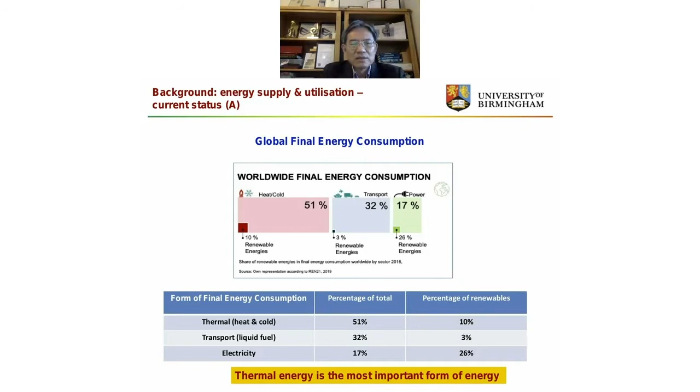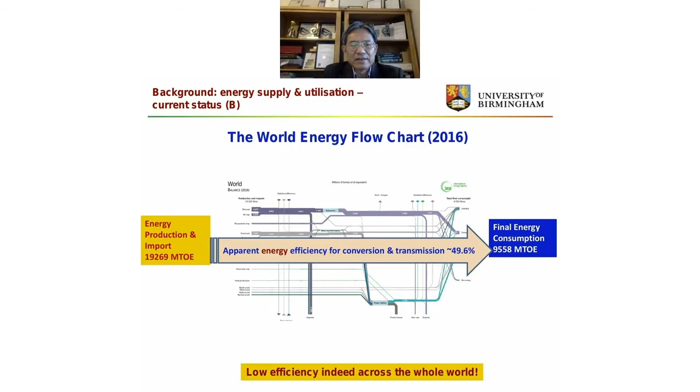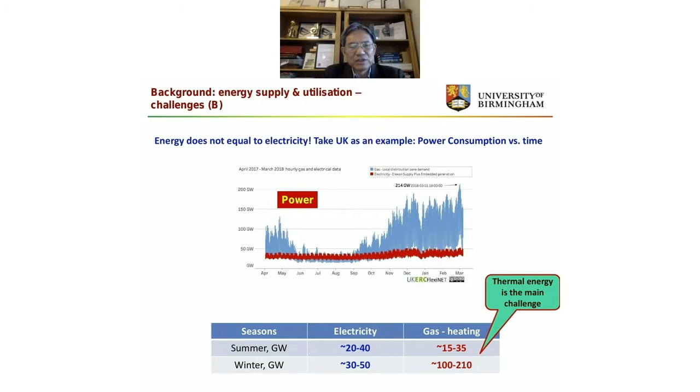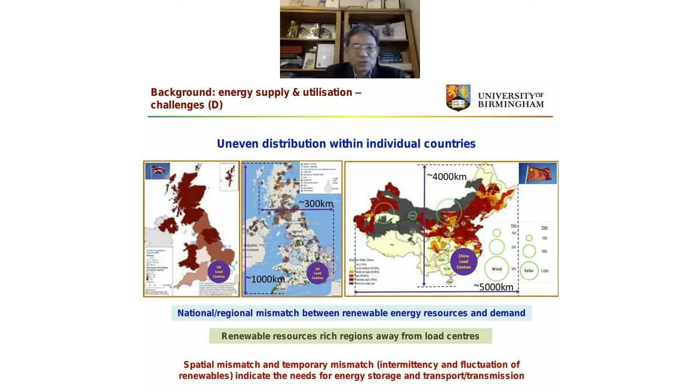So this is actually showing the UK, and the right-hand side is China, which is the biggest polluting country. So you can see the renewable energy sources are far away from load centers, which for the UK are mainly in the southeast. In China it is southwest and east as well. So again, this poses a big challenge for the use of renewables.

So let me just tell you something about the emerging technologies in the energy area, and something which people have not considered, or they have considered but choose not to say. Although we are in a different area, I'm sure you have heard about the electrification of transport, pure electric vehicles in the future.

So I did a simple calculation from the primary energy sources, like coal, fossil fuels, wind, or solar. If we turn these primary energy sources into electricity, the efficiency is about 40%. 60% of that turns to heat. If you then store electricity using batteries, that's probably the highest efficiency for storing energy. The efficiency is about 80%. Actually, it's probably lower than that, which means 20% turns to heat. Then you use the stored electricity for powering an electric vehicle, and the efficiency is probably 80% as well. So if you multiply those, the overall efficiency from primary energy sources to driving a car is less than 30%.

Bear in mind, if you look at the right-hand side, for electric vehicles running in a cold winter, the range is halved, by range meaning the range you are told by the manufacturer. Actually, you can't achieve that range. The reason is that about 50% of battery power is used for heating. Those are actual numbers from the statistics, which you can find on a website. I just put them in a diagram. So basically, half of the battery power is for heating. So again, this efficiency is not very good.

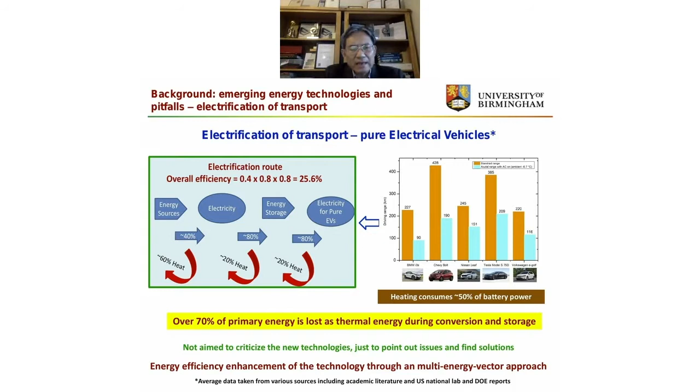And what about the hydrogen economy? People have been discussing the hydrogen economy for 50 years, even longer. So if I do the same thing from primary energy sources, producing hydrogen using electrolysis, for example: we produce electricity first, turn electricity into hydrogen for storage, and then use a hydrogen fuel cell for driving a car. If you work it out, less than 10% of the actual primary energy is used for driving a car. The rest, more than 90%, turns to waste heat.

So here, I must say, this is not for criticism. It's just to try to point out the things which they have not considered, and to try to develop new technology to make use of that waste heat. And this also indicates that something called the multi energy vector approach is important to make use of that.

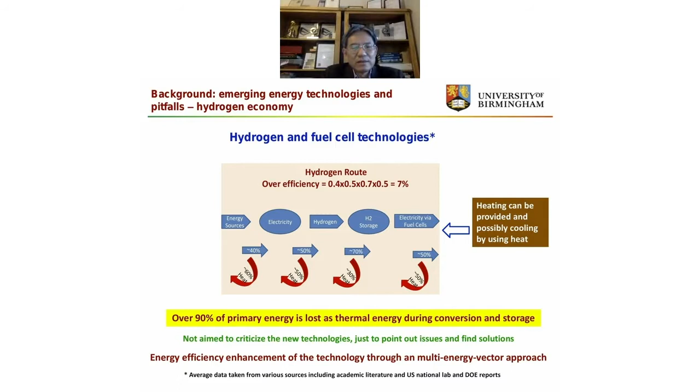So what about very popular ideas about carbon capture, storage, and utilization? What I can tell you is that for fossil fuel power generation, you need to spend about 10% of the electricity generated for carbon capture storage. In other words, the electrical generation efficiency will be reduced by roughly 10%.

And when you capture CO2 and you transport CO2, you need to spend energy, particularly electric energy. For example, you have to compress carbon dioxide to a higher pressure or liquid form, and you need to transport. That would mean another 35% of electric energy turns to heat. So there's quite a lot of loss here. People don't talk about it, but actually we have to consider those from a whole system approach.

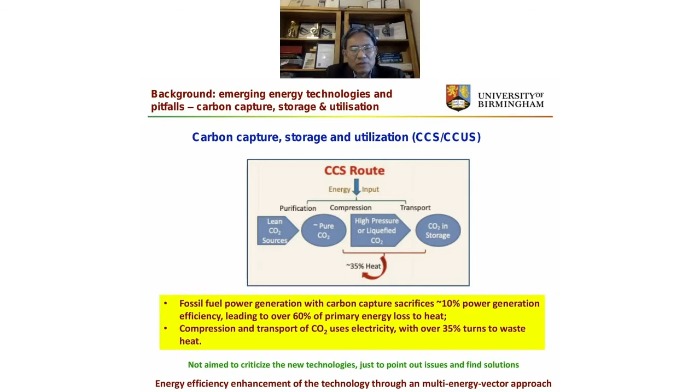What about other things, the new technologies like electronics, telecommunication, 5G, artificial intelligence, autonomous vehicles? I can tell you those systems are highly energy intensive globally. Roughly 30% of electrical energy generation has been projected to be used for data center cooling and telecommunication cooling as well.

So it's big. This is not far away. I mean, 2030 to 2040, think about 30% of global electrical power generation to be used for data centers, telecommunication, and so on. Of this amount of electricity, 40% turns to heat. Again, we have to use thermal energy, including heat, which is important to remember.

And next I'm going to tell you about the main topic, cryogenic energy storage. I'll bring you through the principle and the technology development history, talk a little bit about the thermodynamics of the technology, and look at the world's first cryogenic energy storage pilot plant, some of the results and their implications. I will make some comparisons with other technologies, the cost implications, and also what space is needed for installing this technology. So that's what I'm going to do.

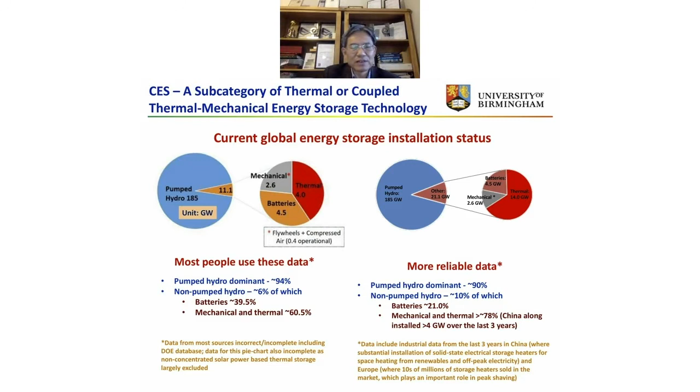Now I'm going to say a bit about the principle of the technology. Cryogenic energy storage is a collection of technologies using cryogenic material, which can be liquids, solids, or other stuff, as storage material. I'll use liquid air as an example to tell you the principle. Basically, when you have excess energy you can't use, or when energy is cheap, you store energy.

In this technology, you liquefy air by using off-peak electricity or renewable energy, so liquid air is the storage medium, and the way air is liquefied, basically you compress first and then expand.

You use a refrigeration loop to turn air to liquid. Liquid air has a density of about 850 kilograms per cubic meter, which is a lot lighter than water. Water is about 1,000 kilograms per cubic meter. So you can have a sort of feel about what liquid air looks like. It looks like water, and it's lighter than water. But the temperature of liquid air is roughly minus 196 degrees.

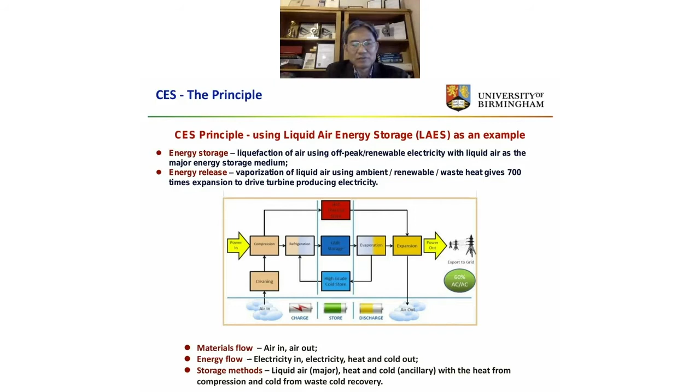This diagram shows you the technology development since I started to work around 2005. We built a small system, 15 kilowatts, then 35 kilowatts. Then around 2008, we built 350 kilowatts and 2.5 megawatt hours systems, and around 2015, Highview started to build the commercial demonstration plant in Manchester, which is a 5 megawatt, 15 megawatt hour commercial system. This is with a Viridor biogas site.

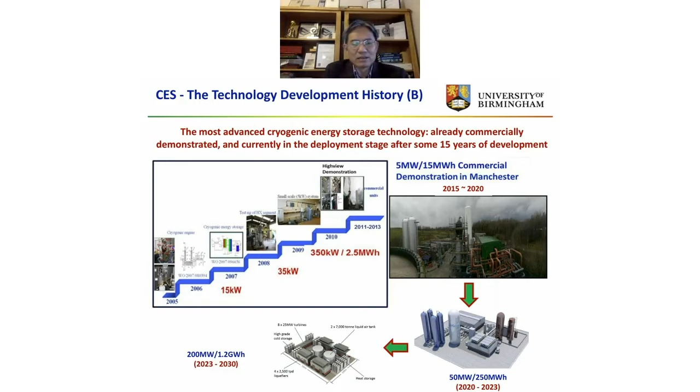So again, this one is just showed as I just mentioned. The left side is the first pilot plant built in Slough, and around 2014, the pilot plant was moved to Birmingham, just behind my lab on the Birmingham University campus, which is quite small actually. Of course, the difference here is there's a tank in the middle, which is for thermal storage. There was no thermal storage at the first Slough site. So this is today used for research and development in my group and the Manchester group.

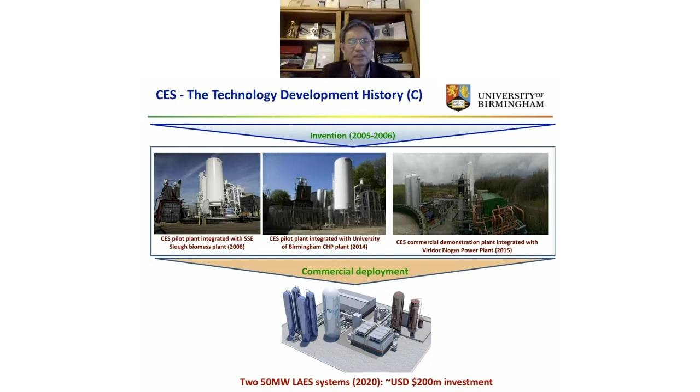Let me just tell you a little bit about the thermodynamic basis. This is very simple actually. If you look at this diagram, the vertical axis is the availability of energy, which means the portion of thermal energy which can be used to produce power, and the horizontal axis is temperature. If we use ambient temperature as a reference, there are two lines. One goes to the hot side, high temperature side. One goes to the cold side. So you can see the availability of energy for the cold side is higher for a given temperature difference with reference to the ambient temperature.

For example, if I take about 150 degrees as an example here, you look vertically upwards. Basically, the availability of energy which can be turned to useful energy is about 40%. If you look at the hot side, it's only 20%, which means cold energy is more valuable than hot energy. And if you look at the mechanism, when you turn matter to the cold side, the kinetic energy of molecules decreases, but the entropy also decreases because the molecules become more ordered. If you go to the hot side, it's the other way around. Linking those two, you can see that entropy plays a big role in terms of availability of the energy that can be turned to useful energy.

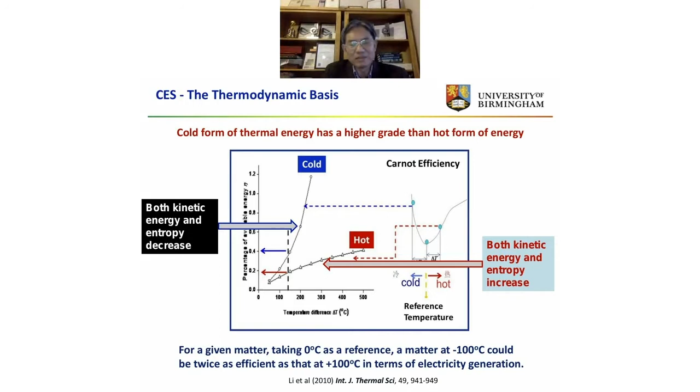And I'm going to tell you a bit about the world's first pilot plant, which is 350 kilowatts and 2.5 megawatt hours, which is sufficient to power about 100 homes for a day. It's on our campus, and actually today it is still the only one which produces liquid air and produces electricity. Still working.

So the first thing I'm going to tell you is that for any storage technology, if you can store and release quickly, then it will be more valuable. For example, frequency regulation of the power grid, which means supporting the frequency at 50 hertz, otherwise the system will collapse. So it is the response speed. That's why I'm going to tell you first how quickly the plant can be started and stopped. This is the testing result. The vertical axis is the output power of the turbine, and horizontal is time. You can see we can quickly start and quickly shut down.

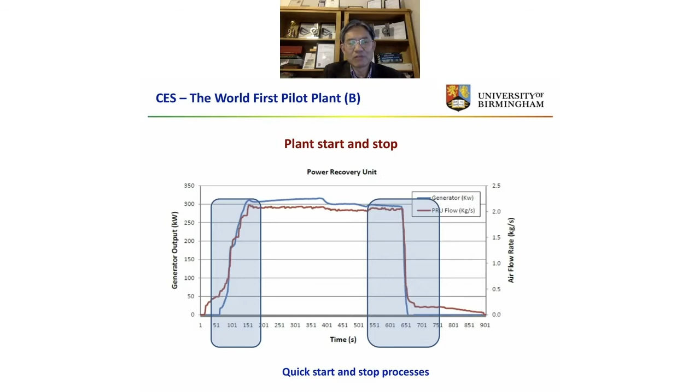As I mentioned, this is a diagram showing frequency regulation of power grids. The vertical axis is frequency. When it falls below about 49.8, you need to support. Basically, you have to react very, very quickly. Frequency regulation has about 3 stages. Stage 1 is that you have to react within about 10 to 30 seconds.

This is called primary regulation. Then the secondary regulation is about 30 seconds to 30 minutes. And the shorter the response time, the more valuable, and the power grid will give you more money for doing that. So that's why I'm saying that.

So although I have said liquid air storage has a response time of about 2.5 minutes, there is a specific mode of operation of the plant. If we use something called spinning generation, then the response time can be seconds, which means we can do primary frequency support for the power grid, which is more valuable. So I think I should move on.

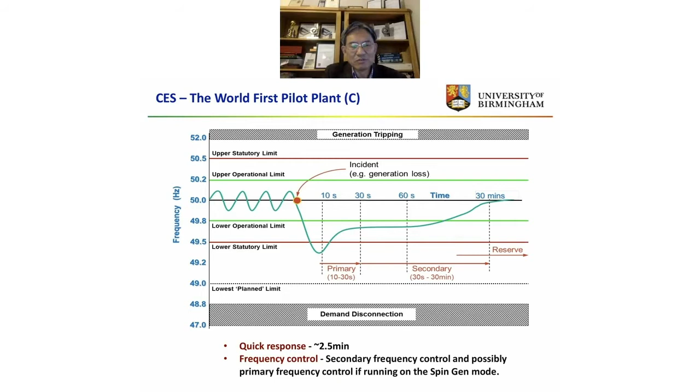And the second result is about the use of waste heat. Actually, because liquid air stores energy at minus 196 degrees C, we can use the waste heat or renewable heat from ambient, from renewables, from whatever other places for increased efficiency of power generation. So basically, you heat the gas before the turbine, which can give you a bit more power output.

So we found that using this technology, every 1 degree C you can increase from environment, from renewables, you can increase power generation efficiency by almost 0.5%, which is significant. And there's no other technology that can do that. There's only this one. So that's why I'm saying this technology can be integrated with lots of other emerging technologies I talked about, because there is lots of waste heat.

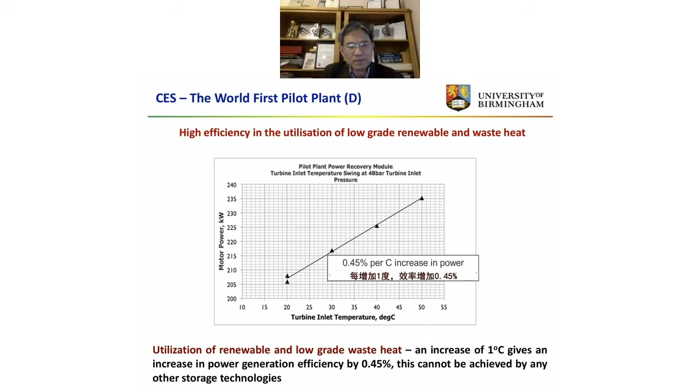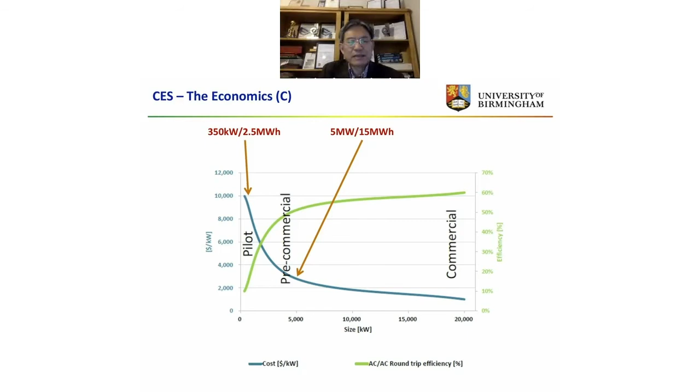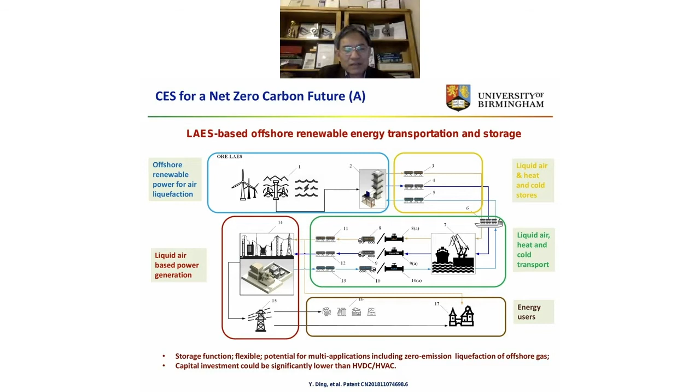So that's one aspect. Based upon that, we developed the concept further into what I call a net zero carbon future, where we use liquid air, offshore liquid air, or cryogenic fluids as a platform. We produce either liquid air, ammonia or hydrogen from an offshore platform, and we use shipping, with support for the cold chain. Because liquid air has a temperature of -196 degrees C, we can use this cold for liquefying offshore natural gas, so that you don't need an offshore platform with a gas turbine to produce liquefied natural gas, because that is carbon intensive.

And of course we can do cold chain transportation, using the cold for fish, frozen fish, and for shipping fish globally. And of course we can use the liquid air or ammonia or hydrogen for zero-carbon shipping, and so on and so forth. So this outlines the main idea.

So with that, I have a sort of confidence. I mean, the future is good. The future UK could be a net energy exporter, where we can ship renewables using this sort of method globally to other countries. Of course, we can ship in a similar way from other countries to us, so it's global shipping of renewables. It will probably become a big future business area, and I know Shell, BP, and other companies are interested in these sorts of methods, and we are also talking to some of the companies about developing that concept and doing a future demonstration.

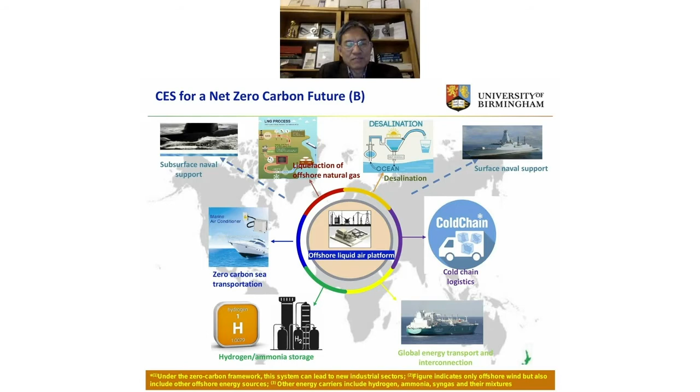And so finally, I'm going to conclude my talk. First of all, of global energy use, more than 50% is in thermal form, which means thermal energy is important. The challenge is bigger than electrical and transport-related decarbonization challenges. The efficiency of conventional energy conversion and transmission technologies is low, with most lost to heat, so efficient use of heat is important. And thirdly, little attention has been paid to pitfalls in new and emerging technologies, for example, electrification of transport, hydrogen technologies, telecommunication, artificial intelligence, and carbon capture and storage, which are highly energy inefficient.

And I think a multi-energy vector approach would provide a potential solution. Liquid air-based technology falls in the thermal energy storage category and is highly competitive in terms of technology maturity, ease of implementation, space requirement, geological limitations, and costs. And cryogenic energy storage, or liquid air energy storage, provides a multi-energy vector solution to a future net zero carbon energy system. And that's all from me.

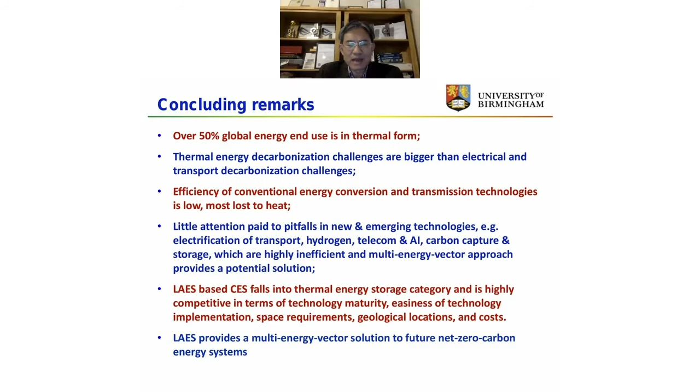Professor, that was absolutely fascinating, and I see there's a few questions coming in. It really is an interesting topic, especially at the moment when we're seeing so many people looking at different alternative energies. One question I would ask myself is, when you're looking at the economics of this plant, is there a maximum and minimum size? Is there an upper and lower limit to the size of the plant before it really becomes economical? Or is this something we could see at a village scale as opposed to a city or county scale?

This is a very, very good question, and I have not talked about that here. So basically, yes, there is. For the standalone system, which I've been talking about, and which Highview is building at the moment, there is a minimum scale, which technically is about 5 megawatts. Economically, it's probably about 10 megawatts upwards. Smaller systems wouldn't work for a standalone system. The reason is that liquefaction of air works for large scales; at small scales it has very low efficiency.